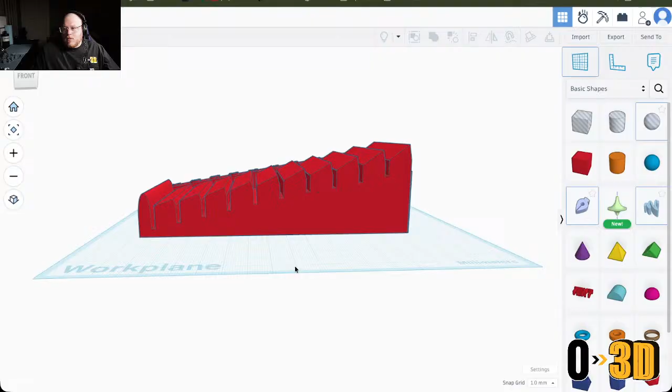So what's going to be new about this next iteration is some of the feedback I got. I wanted to improve the design by making the card slot portions a little bit deeper. In addition to making them deeper, I'm trying to improve this angle here to allow the cards to set into the slots a little bit easier as well. So that's another piece I've got to work on.

Does it look like my stream is frozen? Possibly. No, we are still good. Maybe, who knows? Anyway, I'm just going to keep rolling.

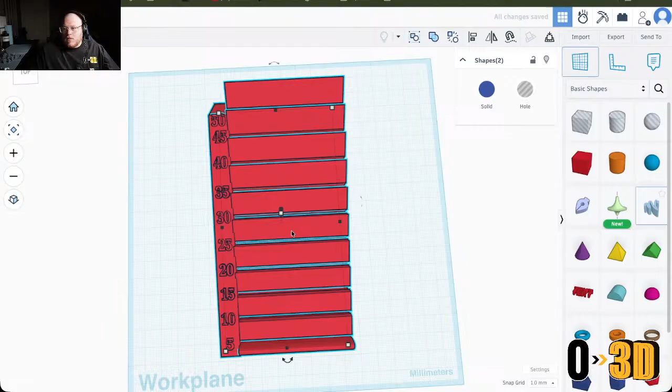Okay, so continuing on here on Tinkercad, we've got, finally, this is back where it needs to be. I kind of want to see if we can center this as well. Let's do a little bit of adjustment to the right here. Nope. We're just going to leave it right where it is. You want to know why? Because I'm still new with Tinkercad, and that's okay.

So it is already dropped to our work plane, and it's sitting flat right where it needs to be. Okay, so one of the things I'm going to start with here, first of all, always make a copy of your work. You never want to overwrite the original just in case you have to go back to a previous iteration. So you can either save as you go, or make copies along the way, so you can go back to a previous version.

Not all software has multiple iterations of the same type of thing. So if this is version 2.0 and 10 minutes down the road I want to come back to version 2.1, I have to make a copy on Tinkercad, so far as I know, and then come back to that 2.1, reopen that file and work from where I left off there. But we're just going to use this copy and see how it goes. I'm a firm believer in not backtracking, unless I have to.

So we're going to start first with an understanding of what this is. We're going to ungroup this. So this is currently a union group, a bundle, and I want to un-union this.

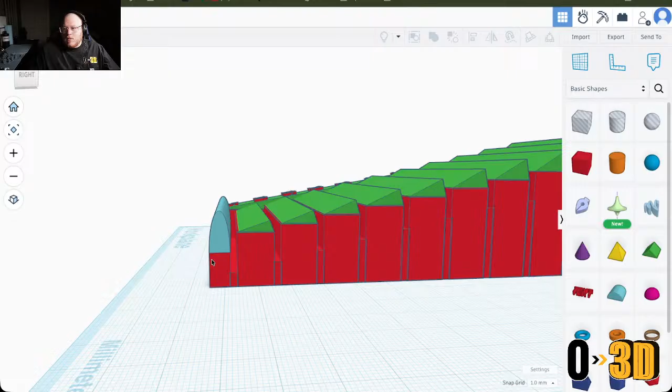So we're going to select all, and there is a way to ungroup right here. Ta-da! And you can see some of the original shapes that I had used here. One of them was a roof, the other one was a box, cubic solid, a box. Also used a round roof here. Lots of boxes. There's some numbers thrown in here because these are the point structures. You actually score the game Rack-O in sections of 5.

So, like I said, learning as we go. Hey, we got a viewer. Welcome, I don't know who that is. Is that from Novice to Nat 20? I'm hoping so. Welcome back if it's you, Jarek. Otherwise, welcome to the content and the stream if you're new here.

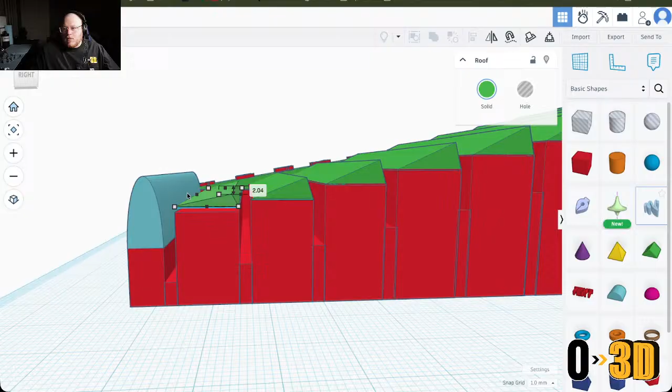Again, new with Tinkercad, figuring out how to do this properly. I'm curious though, if we were to take this and rotate it like that, would that improve the way the cards go in on this side? Yes. Would it make it difficult for this side? Probably. So we're not going to do that quite yet. One solution is probably to put rounded pieces there instead of the angled pieces. That might work, and please let me know if there are better solutions than what I'm coming up with currently. A wedge might also be a piece we can use.

Let's take a look at what the wedge looks like just to see here. Kind of want to see what these look like on the grid on the working surface. So the pyramid is a little wonky. I don't think the pyramid's going to work, so we'll get rid of that guy.

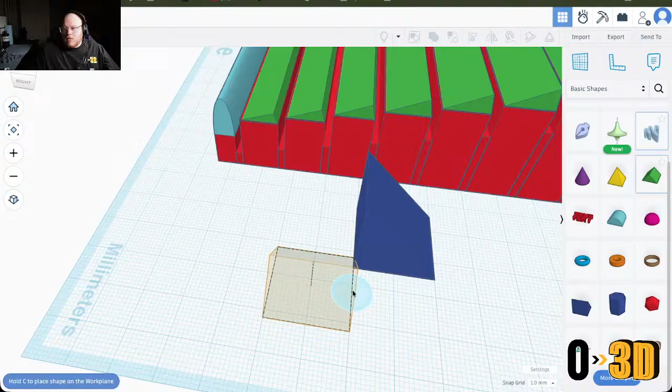A roof could work. However, I wonder if we do this like this. Yes. Okay, so this might be the solution here. I don't know what happened with these, if I just rotated them a bit funky. Yeah, maybe I did.

So I'm going to go from the top view here. Whoa, bear with me as I figure out Tinkercad's controls, ladies and gentlemen. It is a little wonky. Oh my gosh, there's that advertisement again. We're going to mute you. Okay.

I do want to get this measurement. 63.78. So let's do... doing this on a trackpad. If I switch to my mouse, I wonder if that would be better.

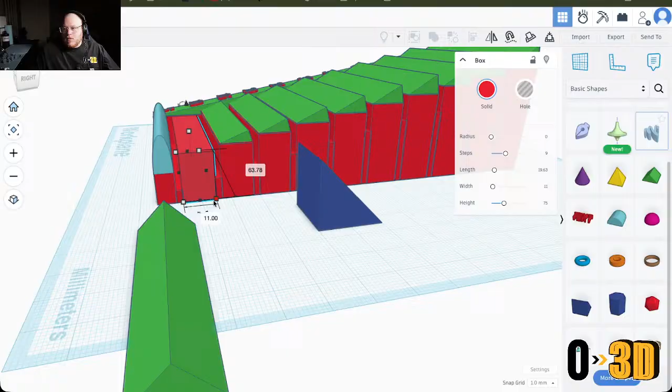Whoa, wrong rotational plane. Okay, so we're going to do this, and we said this was what? 63 point something or other. 63.78. Let's change this figure to 63.78. And we're going to delete this one like so. And we're going to measure this width here. 11. So this plane, this width has to be 11.

Huzzah. And now the height we can go down to, let's try 2 and see what that looks like. Is that enough of an angle? We can find out real quick. 0 to 100 real quick. So let's raise you up. Let's move it here and here and here.

I mean, it's cool how this all works. It's a learning process, my friends. It's definitely a learning process. Why you hover, dough? Why you hover? Whoa. Listen, if y'all have a better solution on how to make this thing drive, I am all ears, my friends. All ears.

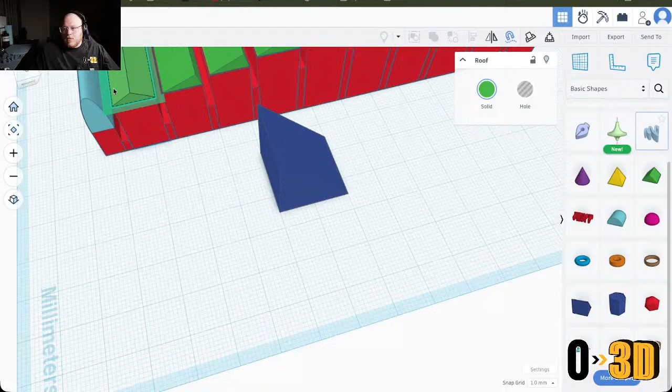Do do do do. Do do do do do. Whoa, wowza. Ain't it fun living in the Tinkercad? I'm gonna get demonetized for this, I'm telling you, it's gonna happen. Living on your own. Whoa. That's a cool trick. Ain't it fun?

I don't want it like that though. So what we're going to do is fix this.

How's the view, Jarek? You still watching? Nice. Ain't it fun?

There's gotta be a way to lock this in right where it needs to go. Not in a magnetized section either. Let's see, folks. Let's see.

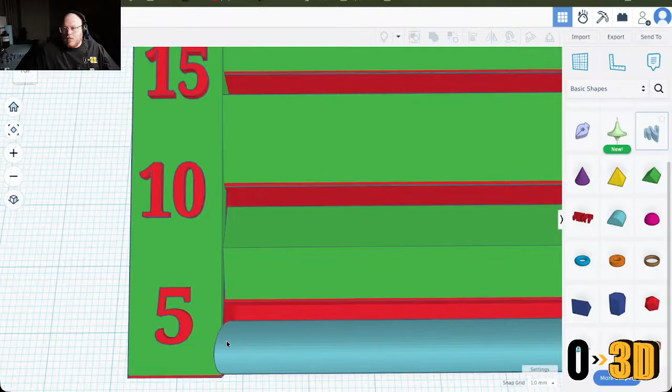Also, these softwares are a little wonky to maneuver sometimes. I'll just be totally transparent. These things are a bit crazy. A bit crazy. Huzzah. Living in the real world.

Okay. Looks good from the inside, I guess.

Let's see. Notice the intense look of concentration on my face. This is craziness, folks, I'm telling you. Have I ever done this before? Not a chance. Can I get some pointers? Absolutely. Can I give pointers? Not at the moment. Let's get some music going again.

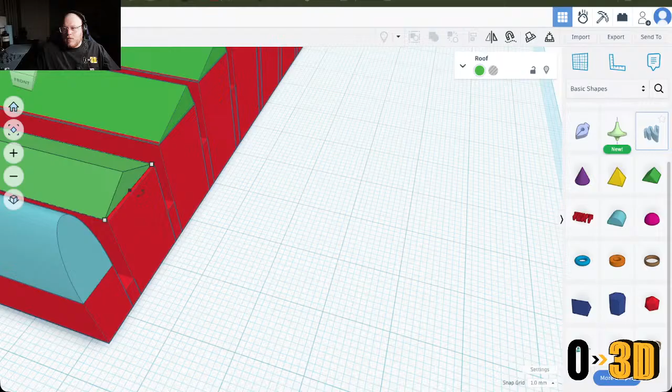It's like a child with ADD. I probably have something. Who knows? Mother, if you're watching, confirm. Or don't confirm. That is the question.

Whoa. I just figured out one of the control elements. Nice.

Okay, I think this one's okay for the moment. So what we're going to do is just let this marinate there. We're going to move on to the next thing that I wanted to work on.

So we're gonna next get rid of all of these green pieces. And my right screen just went black. There it is, back again. Ta-da!

I'm gonna use shift. I'm gonna hit shift and hold so I can manipulate these pieces. Alright. Groovy. That's a bit groovy right there.

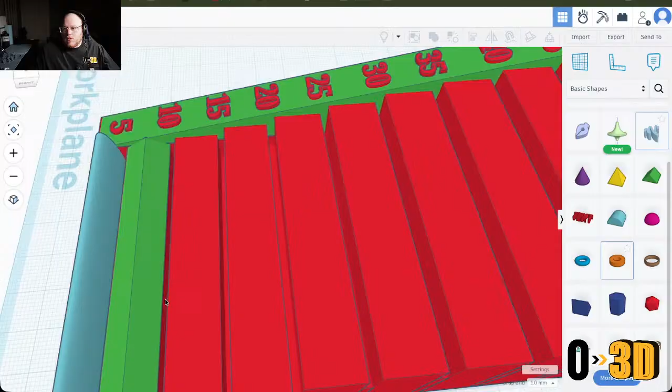Alright, so now that we got those pieces removed, what we're going to do is copy this. But we're also going to verify that our slots here are deep enough. So I want to get this height. So if this is 4 millimeters, what is this one?

7. Okay, so what I was doing before was going up 3, I believe, with each portion. I think I'm going to go a little bit further and separate it with 4. So if this one here at the tall point was 4, this next one here is going to be 8, and we're going to keep going up incrementally by 4. So if that's 8, this should be 12, and so on and so forth.

So 12 to 16. Wow. 16 to 20. And folks, correct me if my math is wrong. In 20 to 24, we can see that they are increasing semi-exponentially, not exponentially, but in the shape of 4, they are increasing accurately. So if this one was 24, this next one is 28.

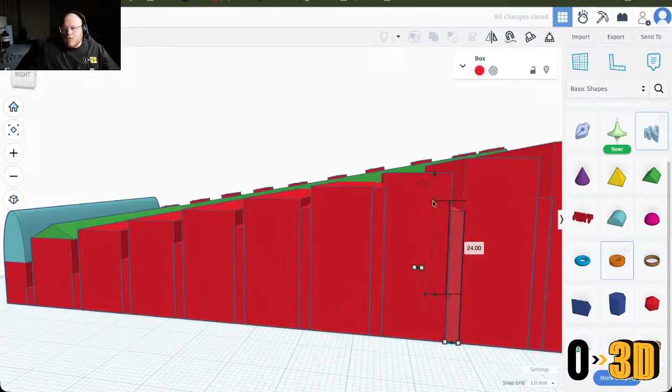This is really raising the bar, folks. Literally. Bow, bow, bow.

36 and 40 should be our last. Whoa. Did not mean to do that. That's okay. Life goes on. And on and on and on and on.

Okay, so now that we have that portion solidified, we're going to then move to these little secondary pieces here, I guess. So if this one is 16, we're going to do the same type of thing. So 4 is to 16 as 8.

Wow, brain stopped working. If you know that quick math, let me know. 4 to 16. So this is 8 to 20. This should be 12 to 24. 16 to 28.

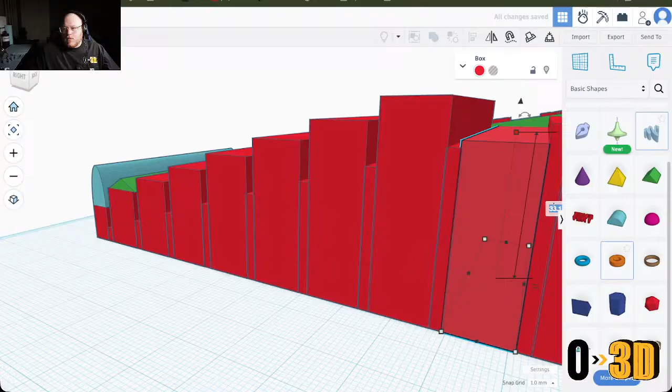36. To then go to 40. Then we shall go to 44. I hear my dog begging at the window next to me. She's not getting in here. 44 to 48.

From 48 to 52 should be it for completion of the stair steps. Yep, that looks fairly decent. I don't feel that I need to raise this any further.

What I might do, however, is put an extension on this to allow the 50 to actually go towards the slot. And in so doing, however, that does bring that out a bit. But we can make negative fill there to fix that.

See, this is what happens. I get distracted.

Do do do do. Do do do do do do.

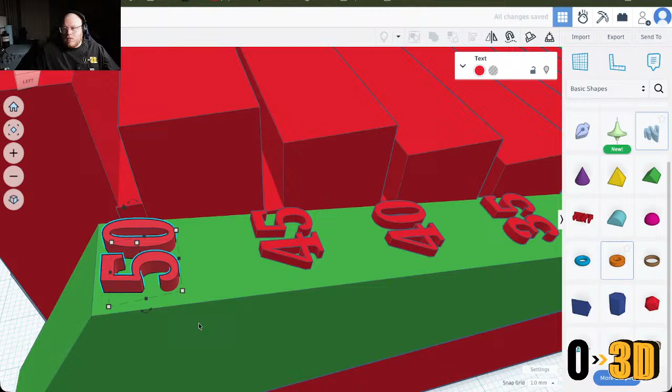Okay, so now essentially this hole could come all the way over there.

Lovely. Isn't she lovely? Does that do what I wanted to do? I don't think so. Not quite. So I've got to create another piece here and make that a hole, which should be fairly simple. Just create a box and create the negative space, right? Right, something like that.

Box, I don't want to box you in. It is a hole. This music's kind of nifty.

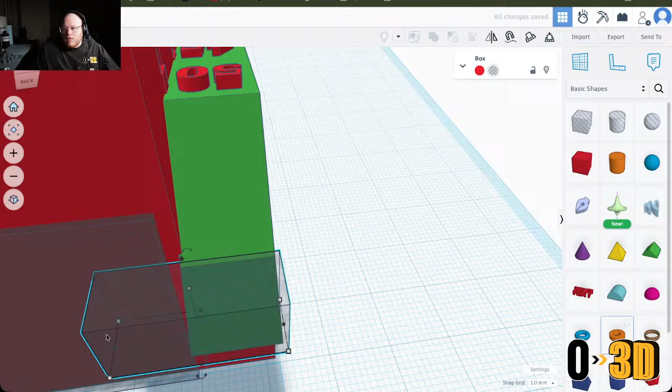Will that be sufficient, ladies and gentlemen? I believe so. Does that cover everything we need here, there, and everywhere? Whoa, craziness. I don't want to see any green. I see, I see.

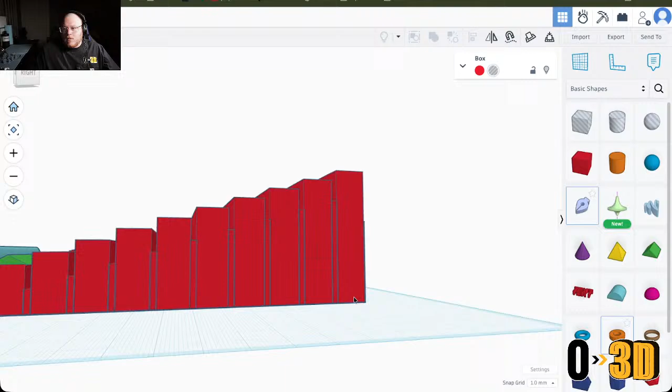Ads are still playing, but we're not going to listen to those, and we're going to be okay. 5, 10, 15, 20, 25, 30, 35, 40, 45, 50. 50 wonderful opportunities for points right there. Nice.

Okay, so I like how this is looking so far. And I do think this roof piece, I don't know why I didn't use it in this fashion before. What silliness was I thinking? And we'll look at the year.

Okay, so pretty much we're going to keep copying and pasting these pieces. And since they're on the same, going up every 4, we can keep that still here. Actually, I'm going to undo that. Reason being is because I like the way the second one is positioned, not the first, if that makes sense.

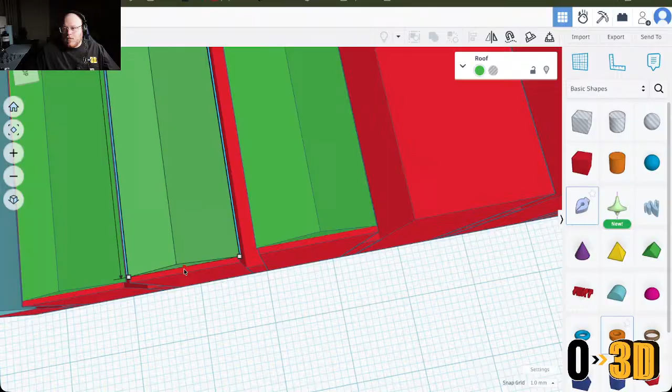Okay, so now that this is in place, I'm going to start the copy paste sequence again here. So copy here, paste here. We're going to raise it up, slide it on over.

Are these not the same width? That's so funny, 11, 11. Oh, 11.83. What did I do? What silliness has I done? Well, folks, I'm a perfectionist, so what we're going to do is we're going to fix this. I don't know why, because it should be right the first time.

Shame. Shame on moi. Okay, at least that's a nice even number. Ugh, now it's going to ruin the whole thing. Folks, this is going to be longer than I'm intending it to be.

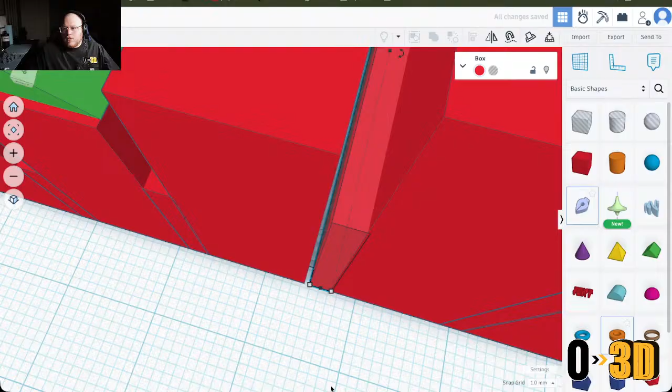Craziness, how did that even happen? This is what happens when you don't pay attention. Even 11, let's do the same thing. Ugh, I am ashamed. Problems.

99 problems and a Tony's the main one. Whoa, don't even play an ad. Don't you do it.

I have a feeling it's going to play an ad. Whoa. What is happening? How do I fix that? Whoa. Crazy.

Okay, so I see what happened. That's crazy, folks. Okay, so the music is playing through. Forget it, we don't need music. We'll be okay. Interact, oh, I can interact with it. Oh, that's beautiful. Oh, folks, I just solved every problem.

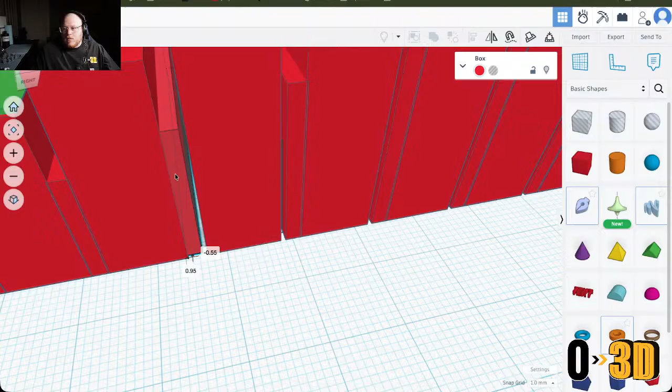Okay, so if this middle piece is messed up, then the rest of them are probably going to be messed up too. Okay, so what's the width of this? Now Tony has to find out. 2.37, 2.37.

2.2. What in the world? What have I done? 2.2, 2.2. Yo, this is crazy though. 2.2. Ouch.

So what's going to happen right now is Tony's going to drag all of that over. Whoa, not like that. Whoa, pressing buttons by mistake. Close that software.

Okay, so if this one here is 2.2, oh, Tony, you're such a goofy goober. 2 point, all of it, 2 point, all of it, all of it is messed up.

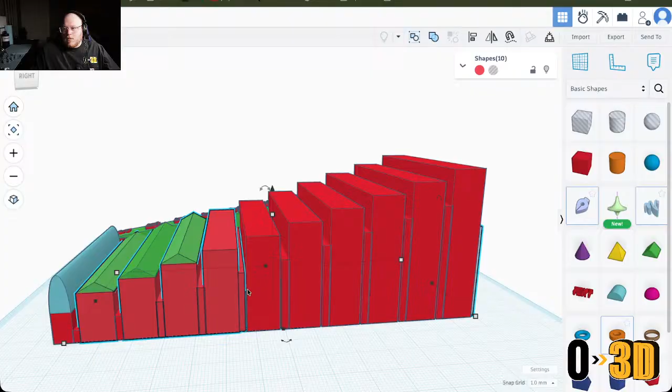What a goofy goober I am. You're a goofy goober, yeah. I'm still a goofy goober, yeah.

Okay, we're gonna start fixing this at the source. 2 point... what did we say, 3.7?

Folks, I don't know what happened. I promise you it ain't gonna happen again next time I'm designing something. This is the first time I ever used Tinkercad, and I messed it up miserably. However, I got the point across with the gift. The gift was a success, in the sense that she absolutely loved it. At least acted like she did. It's hard to tell sometimes when people get gifts.

What did I do with all these crazy numbers? I will say this: I got the measurements from the original Rack-O piece, so at least I'm not totally delusional. I did copy it over and made sure I was following the original sizes and measurements and stuff like that. So with that in mind, I feel like I at least accomplished something.

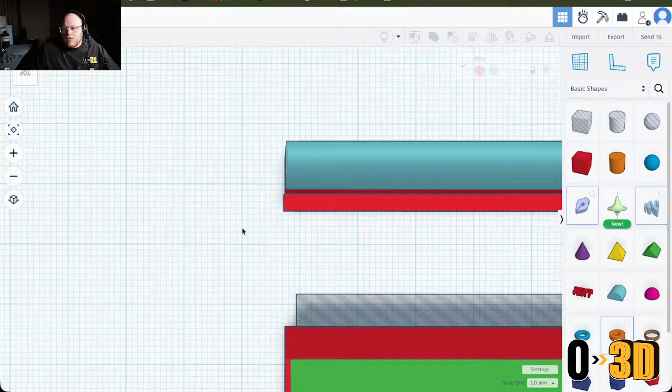63.78. What is this depth width?

So we're gonna start fixing everything. I want it to be right, folks. I cannot control this, I'm so sorry. I'm still learning how to use Tinkercad, clearly. Notice that gap in there? That gap needs to go.

Why won't this fix right? Anyone else ever have problems with Tinkercad like this? Let me know in the comments if you do, because I really need to know. If it's just me that's a screw up, I mean, it probably is true. However, I don't want to say I'm like a genius by any means, but I know I'm not a complete moron with technology.

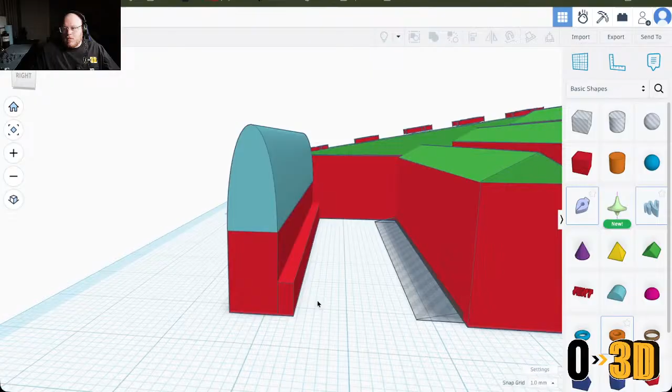We'll at least go with this. This is looking somewhat better. How? How?

I quit. No, I don't. I'm kidding, I won't quit. I won't fail us now.

Okay, so let's do this. I'm going to line these up on an actual grid line, like a normal, sane human would.

D&D related. Also, we're going to go with half increments here instead of this craziness of the points and such. So let's just make it an even 63, because that's going to bug the snot out of me. Okay, great. We're doing this right, folks. I promise we're going to do it right from here on out.

I'm ashamed, I tell you. I tell you what, ashamed I is.

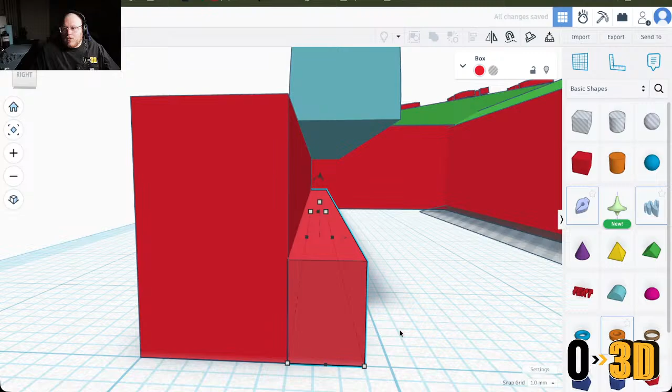We're gonna just make it 3 mil, because why not? But then I feel like it's too wide, no? A playing card, like a standard size playing card—how would that work? Would that fit in this slot? Okay, you tell me.

Okay, Jarek, you played poker professionally. I don't know if that's allowed to be said in a livestream. However, let me know if 2 millimeters is good for the depth, the width of this card slot. Otherwise what I'm going to do is make it 3 millimeters. Let me know. Yes, Jarek, I'm talking to you. Novice to Nat 20.

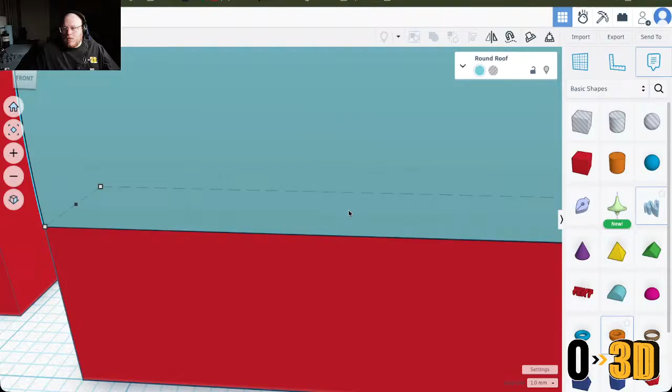Oh, look at those clean lines. That's how it's done. Beautiful. See, I'm already feeling better about that.

Jarek, the width of a card. I'm texting you.

The width of a playing card. Should I leave the gap to be 2 or 3 millimeters? You can answer your phone if you'd like. Just kidding, nobody ever really answers their phone. It's okay, it's okay, Tony, it's okay.

You know what's going to happen? It's going to be even 63. You want to know what's going to happen again? It's going to do the matchy match thingy thing.

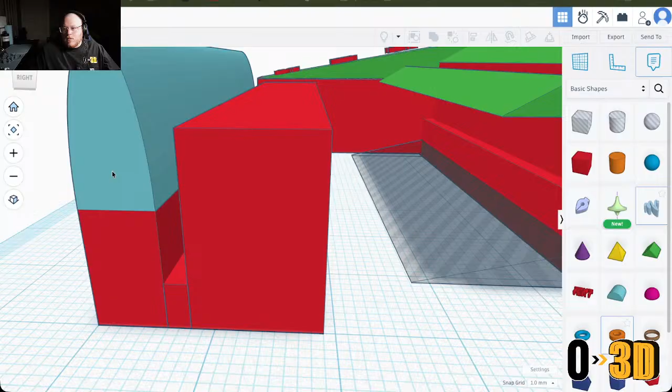What made you start? Do you want to try to monetize your creations in the future once you get more familiar with the software and printer, or is this purely a hobby? This is purely out of hobby, just personal interest in 3D printing and wanting to try something. I fell in love with it and finally just decided to go for it. I never wanted to do YouTube or live streaming, but now that I'm here, it's a lot of fun.

This is technically video 6 on YouTube, so it's kind of cool. In lieu of a pre-produced video, I'm just live streaming a design portion. I don't know if you'll watch the beginning of the stream again later, so I'll just explain it again.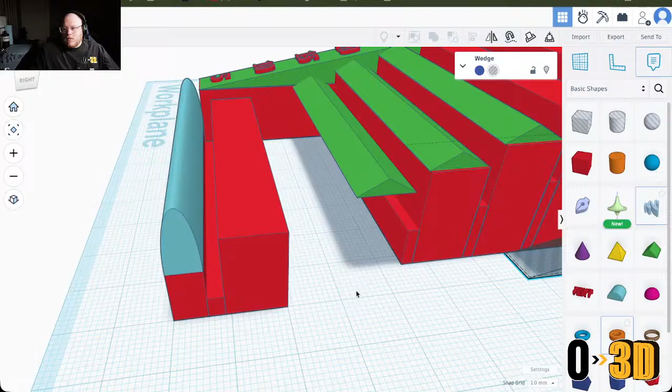What I'm making is a card holder for the game Rack-O. It's a card game where you put cards in sequential order. The numbers go from 1 to 60, and you don't know what you're going to get at any time, so you're drawing a card, guessing, and moving cards around at different points. The rules are better explained than I am, but my wife's grandmother is in her mid-90s, and this is a card holder for her to help her play the game better, to see the cards, because the original card holder is perfectly flat.

Wow, there's my camera. It's perfectly flat. So what I did was adjust it on an incline just a little bit, hopefully to help her see the cards better. I also designed her custom cards with bigger font, clearer text, and fewer distractions so she could just see the numbers on the card. That was her Christmas gift.

So, yeah, this is design iteration number 2 of that card holder. I got some feedback from it and wanted to try to do it better this time. So that's where we are.

Yeah, it's crazy, the design process. I think what I'm going to do now... Okay, so long story short, I'm just redesigning it from pretty much my first iteration and tweaking it. I'm realizing I have so many different mistakes in here because I'm very new to Tinkercad or any CAD software. I guess the whole point of the YouTube channel is to learn in public.

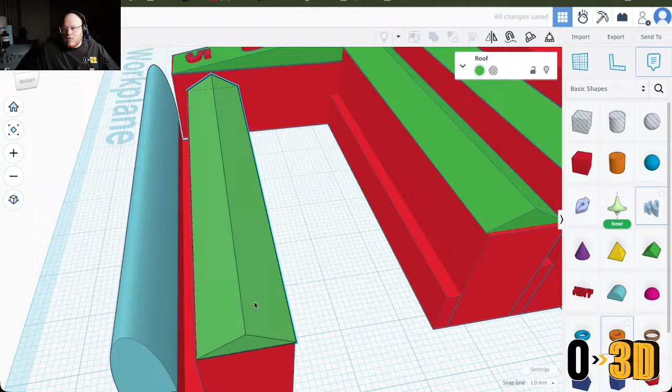So that's exactly what I'm doing, learning as I go. I want this to be exactly 11 wide. But yeah, thanks for hanging out from Latvia. I think that's amazing, I'd love to go visit Europe at some point.

Oh no, my webcam is frozen. That is good information, thank you. Da, da, da.

Yeah, OBS has been messing up tonight for me. I think I'm just going to get rid of that webcam source. Let me fix it here real quick on the back side. I'm just going to go old school, call it a webcam, and go from there.

I have a webcam, but I like my other camera better. I don't know if it's just frozen because of the webcam. What if I refresh this? Ooh, oh, it works. Thank you.

Yeah, CAD is not very newbie friendly, unfortunately. Even just, so I'm doing this off my Mac, using a wireless trackpad with a keyboard, and I thought this would be easier because I'm used to a laptop, but I don't think it's easier, not any bit yet. Also, I'm still learning how the controls work in Tinkercad. This is my second time using it, and I haven't touched it since December.

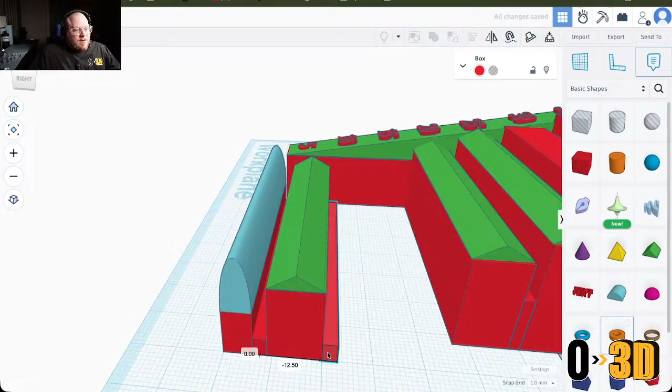You would think I'd know proper audio etiquette because I'm a podcaster on the side as well, and I work in broadcasting - my 9 to 5 is at a TV station. So you'd think I'd know proper etiquette for the mute button, but apparently not. That's alright.

We're gonna keep going. I think my problem is I always think I could fix it in post, but post is not always the solution, especially not with a YouTube live. So what we're going to do is delete these. No wait, I want to fix this first. No, that is the fix. Okay, I see.

Okay. Yeah, I'm already feeling better about this.

I'm digging this music too. Super chill.

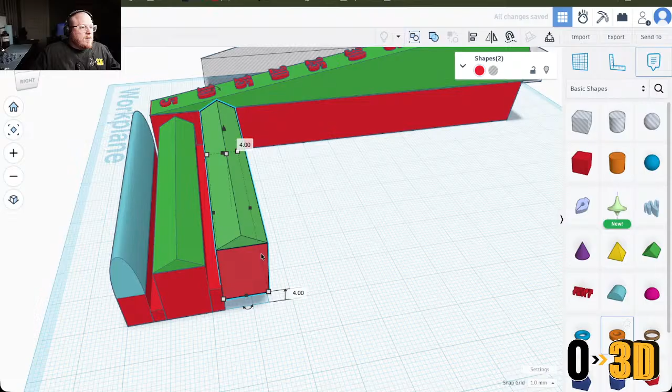Even 20. Let's bring her back down. Huzzah. There might be a better way to do this, by the way - I don't know what that may be. Like I said, it's a learning process.

Okay, now we're making some progress here, folks. I can't believe I didn't do this earlier. You know, logic dictates that you improve with each new time you do something, and I'm hoping I'm improving as I'm doing this. If you guys have any helpful hints, I'd love to hear how to improve my workflow, to make these streams both more entertaining and more fruitful with time management. I don't want to waste your time, my time, the internet's time, because there's enough videos out there for 1.5 million people to be watching all the time. There's billions of hours out there, probably trillions by now.

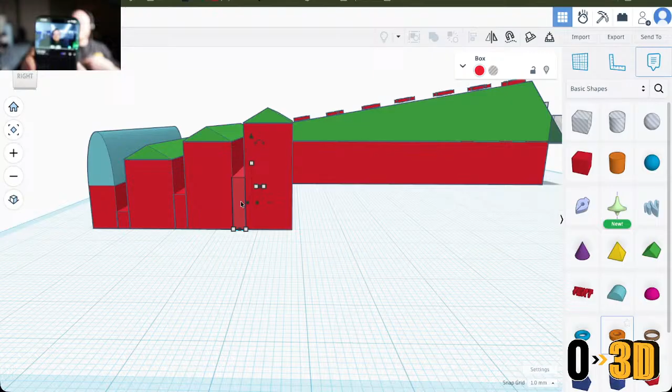Okay, a guy I knew from college - he's live streaming as well right now. I wish I could be watching his stream. So, not darker, but I guess I look a little rougher for the wear. My voice is deeper than it normally is.

We got 5 minutes until things go live. I checked it earlier. Okay, so my friend has a book coming out - another book coming out. And it's going to be great. His first books were excellent. He's a fun dude.

Love this. I'm going to have that going in the background just because I'm a media dude. I can't help myself. All right.

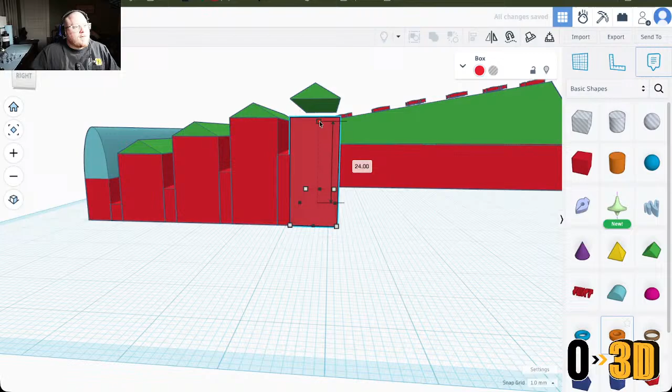Okay, let's keep designing. All right, let's bring this to 16. 3, 4. Bring this to 24. Hey, so much cleaner.

Okay, 20. Wow. 32. If you guys have anything that you'd like to see me design in the future, let me know. I am new to the design thing, but love figuring this out.

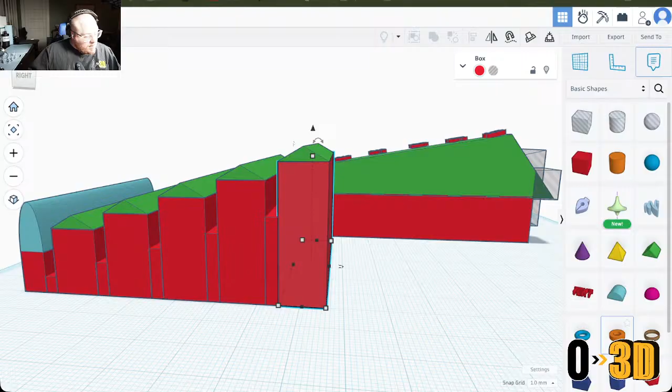All right, so got 1, 2, 3, 4, 5. Hey, we're halfway there. 24. Let's go number 8. Huzzah, 1, 2, 3, 4, 5, 6. I need 10 slots.

Okay, so my friend who is streaming through Mistwood Publishing channel, he is launching his Kickstarter tonight, so I'm so excited.

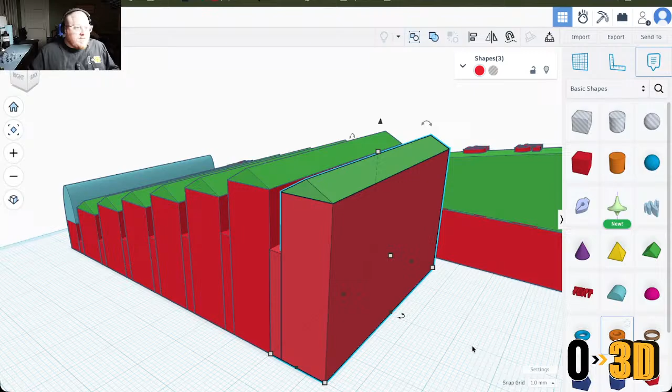I grew up with his wife, Sarah, and then we all went to the same college. Folks are awesome.

28. Do, do, do, do, do, do, do.

I will spend my money, Seth. Or Shay. Wow, my brain stopped working.

1, 2, 3, 4, 5, 6, 7, 8, 9, 10. Haha.

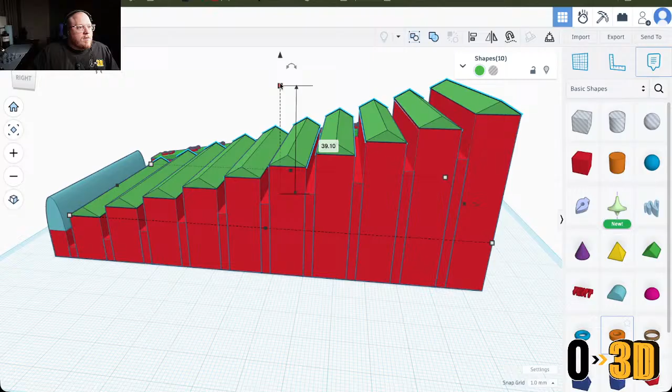So excited for this. Medium male - he's talking about medium male in his thing. What happens if I change this to 4? Ooh.

Nice. I think this angle will be better to get the cards in the slots. What are your thoughts, folks? Would love to hear.

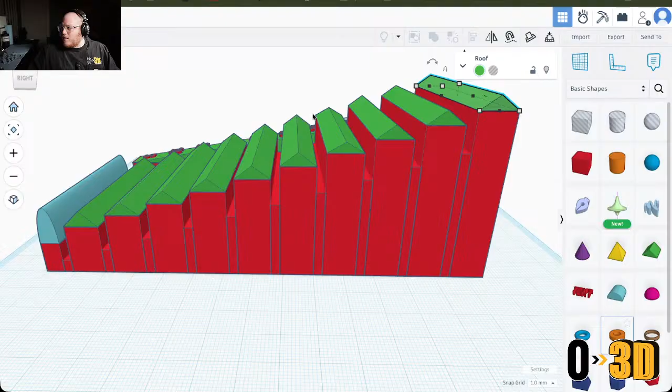All right. I'm a little loopy right now. So excited for this now. I'll be totally honest, redoing this in an equal and clean manner makes me feel so happy. That's so much better. Wow, okay, so this is 63 mil.

So just the score portion here, I guess it doesn't need to be anything crazy. Okay, so this is 11, and that is 3. Okay, so 14. 28. So that's 146.

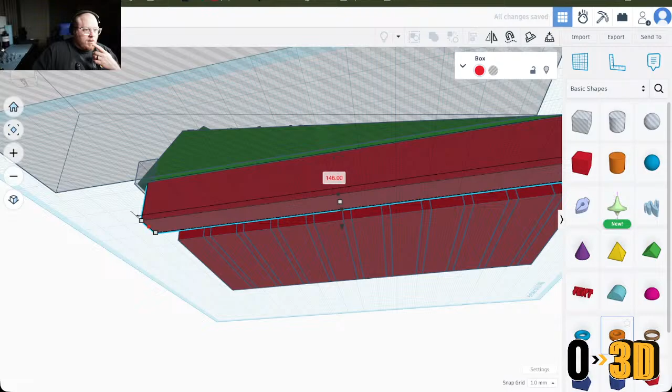That's so much better. So clean. Let's make it an even 10. Nice. Ta-da.

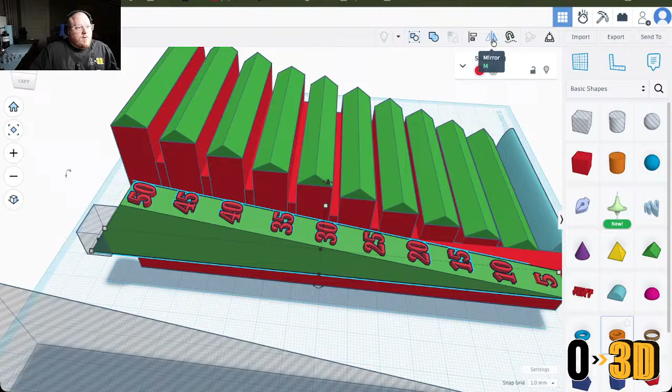I'm going to see this from the top now. All right, folks, we're doing it, we're doing it. Oops, I missed my 5. That's awesome.

This dude that I'm watching, oh my gosh, he's so funny. Shay E. Rock.

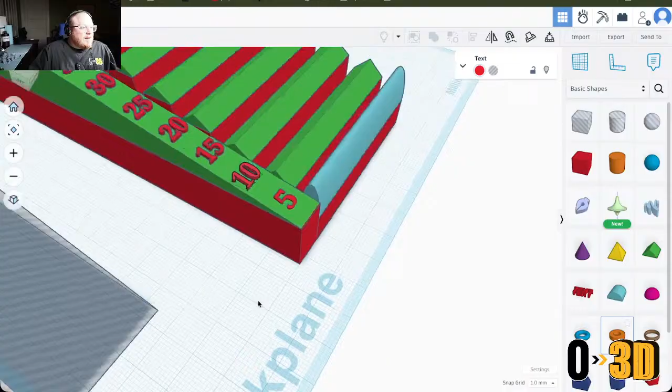Let's do this. Oh, a little too high. This music is so chill. Okay.

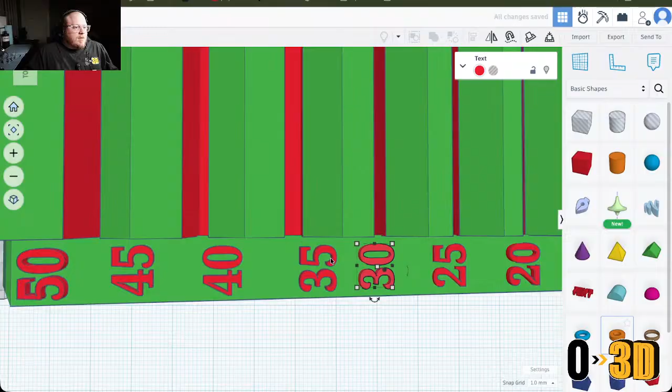I think that looks better there. I am just making these decisions as we go. Huzzah.

Lovely. All right, all right, all right, all right. So now my next portion here is to... Let's go back from the top again. Reason for that will be I want to group these things together properly. Okay, so yeah, we can do that from the top.

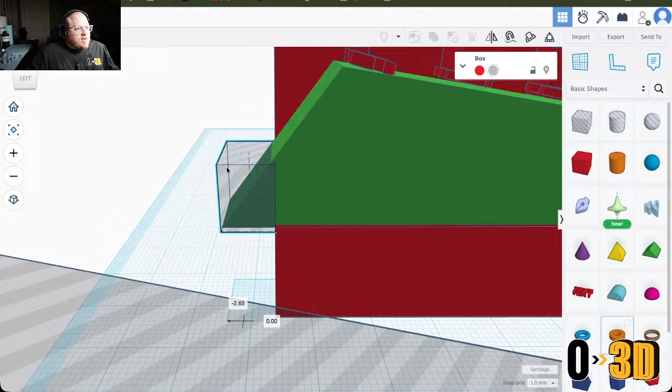Huzzah. Alright, so we are going to group them. Bundle group? Union group. Bundle group. Okay, so I'm going to adjust this guy to just cancel out this little hang off.

I think that will work beautifully. Okay, I am in the unbundle. Okay, now let's do the bundling again. Aha.

So because of that cube little thing here, that square, this guy that's a hole, which is right here, that's helping to cut off that back portion. That's looking lovely, folks. I'm kind of proud of this. I usually don't take pride in my work as much as I should.

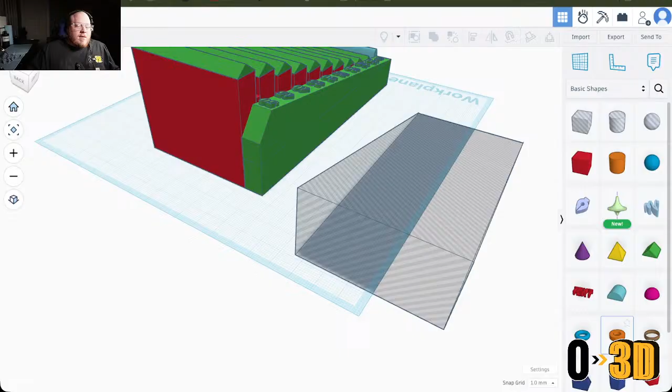Anyway, what we're going to do next is... I think this looks good so far. Did I go with 3? I did go with 3. Thank goodness, okay.

Next portion is we're going to bundle these. Huzzah. Actually, I'm going to undo that first. Reason being is because I want this to go inside here. So this width is 63. Let's make this 60, maybe 61. Huh.

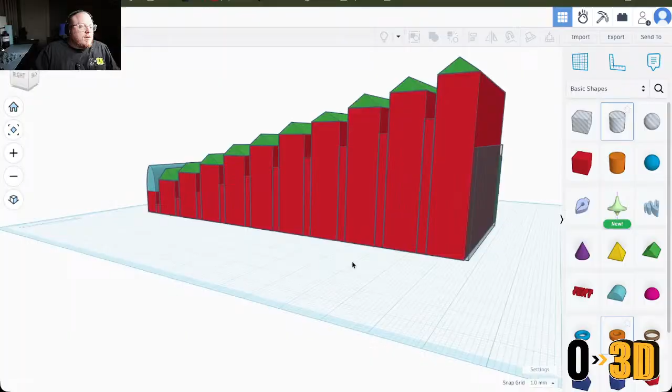Yeah, I'm digging this, folks. All right. Let's go to 36 for that. What if we do 38? Oop. Huzzah. All right. All right.

You know what, I'm going to undo that because I want to move this in just a little bit. Okay, now we're going to go back to top. Huzzah. Ta-da! Great. Digging this, digging this.

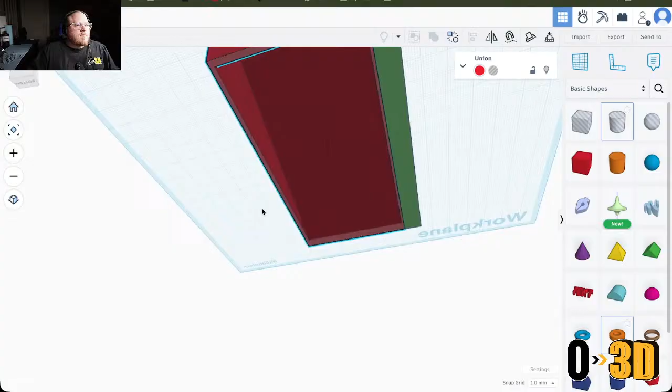Okay, so let's, you know what, I'm going to undo that and take it a step further. What if... what if... this a lot.

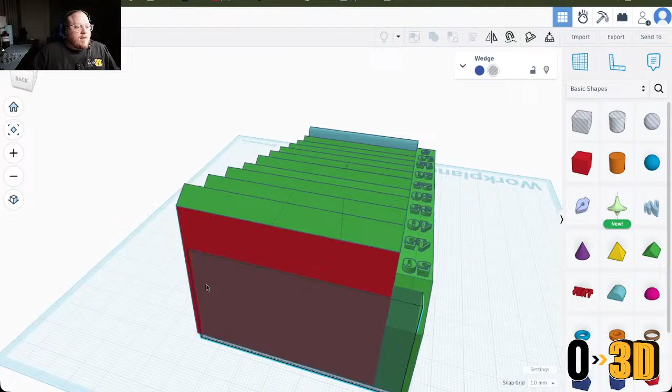All right, well, it looks like we're kind of wrapping this up, folks. Not gonna lie, this is super fun. Whoa.

Okay, so now that this is... I think adjusting the height might help. Let's see what that looks like. Yes, I'm going to put it there. Reason being is because this is looking fantastic. I'm super happy with this.

Did I lose my screen? Yes, I did. I lost my camera monitor. That's alright, I'm still able to see it on my computer. I like redundant systems, folks. Ask my coworker.

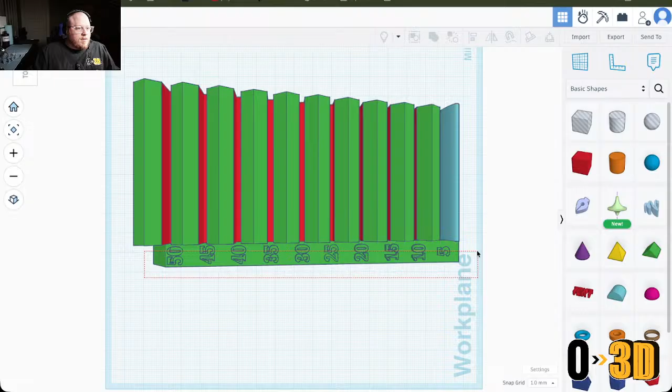Unbundle. Well, I know that's hard to get you to believe me, but I just want you to know that if you're ever feeling down or depressed, and you just feel like everything's wrong with your life and you want it to stop, just know that there are people there for you. Whether you're aware or not. Yay! It's a really hard time. I was able to hollow it out a little bit. Oh, that's beautiful, a little bit of effort. I know you won't believe me at first, but you just have to have a little bit of faith and a little bit of hope. If you're listening to this, know that I believe.

Ooh, I've got a creaky chair, sorry if you're listening to that. I kind of think I need to adjust the height of this so as to prohibit the cards from going off the side. That's what that wall is there for to begin with. Okay, I'm going to do that real quick, and that should be the last thing I do.

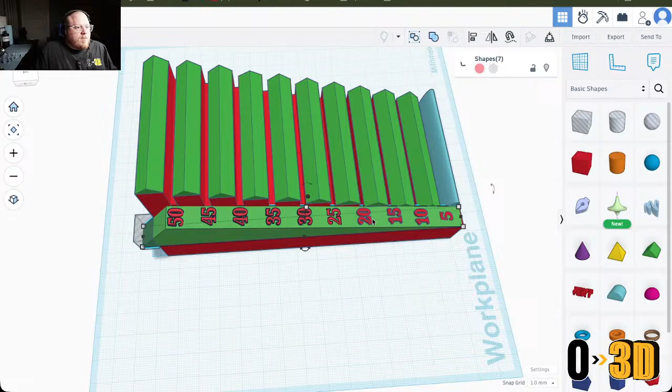Do do do. Huzzah. Nice. Okay. That should help on that side. Okay, we are able to see some of that stuff there. Great.

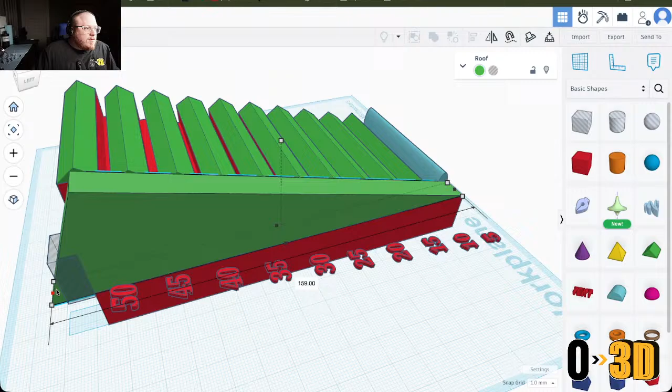Almost there, folks, almost there. That's kind of cool, that would make more sense doing it that way. Alright, let's block this off.

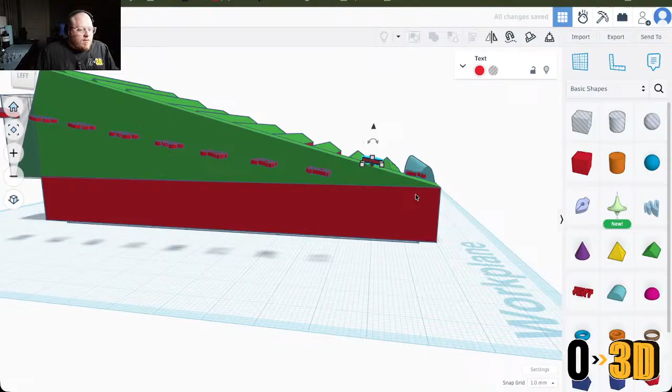I'm loving this. Bring it up. What about angles?

Yeah, that's a good angle. Well ladies and gents, we're just about there. Okay, so this angle will be 6 degrees.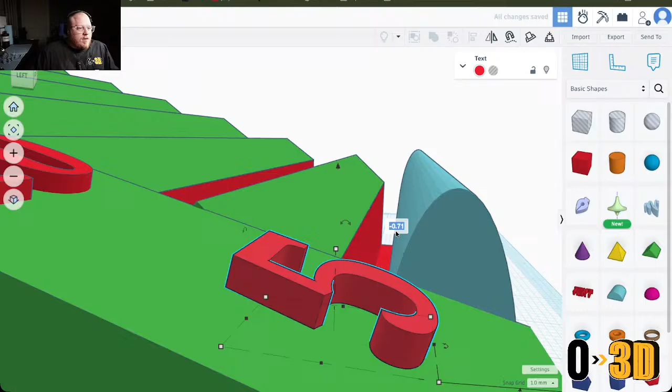I'll leave it back where the rest of them were here. Negative 0.5. Negative 0.5, yes.

I gotta fix that, ladies and gents. I'm learning my mistakes.

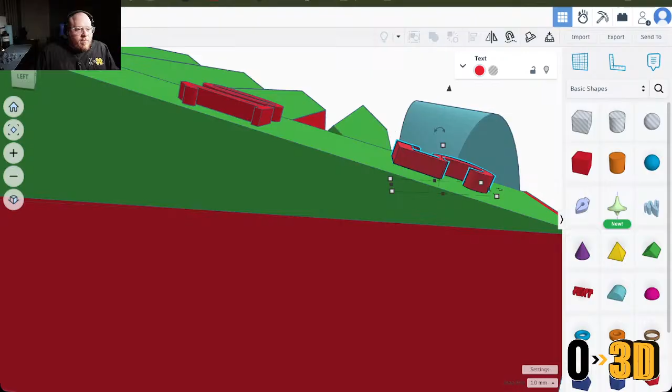If you are just tuning in for the first time, I am redesigning what was a Christmas gift for my wife's grandmother in her mid-90s. This is a Rack-O card holder. The game had originally had a flat card holder, and this is a redesigned version. I had it slightly less inclined than this version. This is version 2.0, and I'm kind of just testing my hand at it, seeing what it's looking like, and we'll see how it goes. I'm looking forward to the outcome of this one. I'll probably print it tomorrow, that way we could try to use it in a game.

I will say it is better to use an FDM printer for this type of product as opposed to a resin-based printer, but c'est la vie. I'll have someone make it for me if I need to.

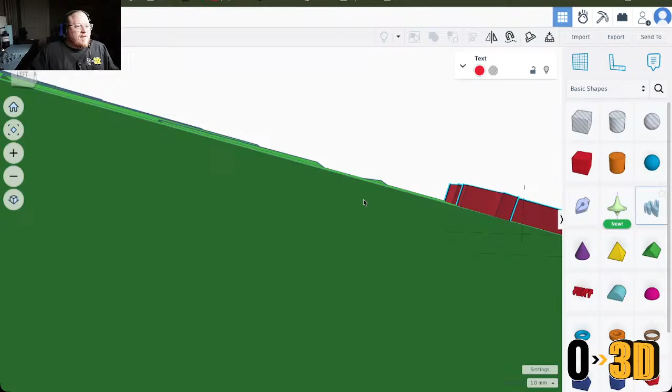Almost there, ladies and gents.

Green Lantern is the place for me. Sorry, my friend on his live stream is talking about the Green Lantern. Farm living is the life for me.

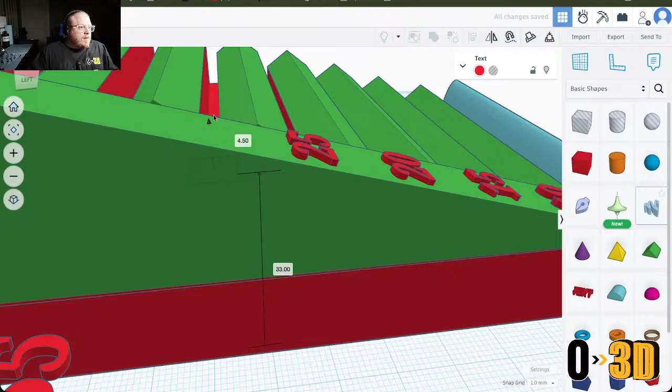Do, do, do, do, do, do, do, do, do, do, do. Huzzah. Do.

Let's fix this angle. Another 2 degrees.

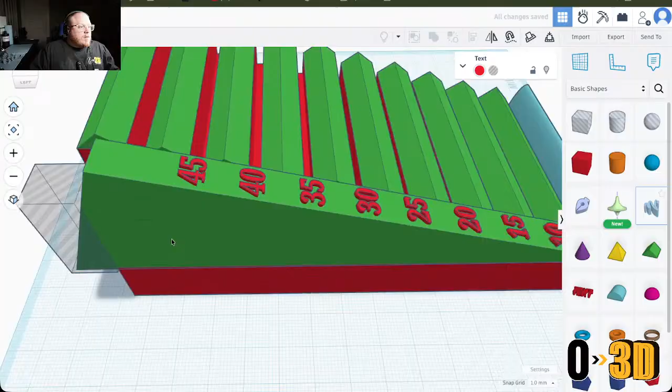Ladies and gents, we are just about there. Oh, don't do that, Tony. Oh right, oh oh. We are on the last one.

Let's do 3 degrees. And on the count of 3. Okay. It's 0.5. Whoa.

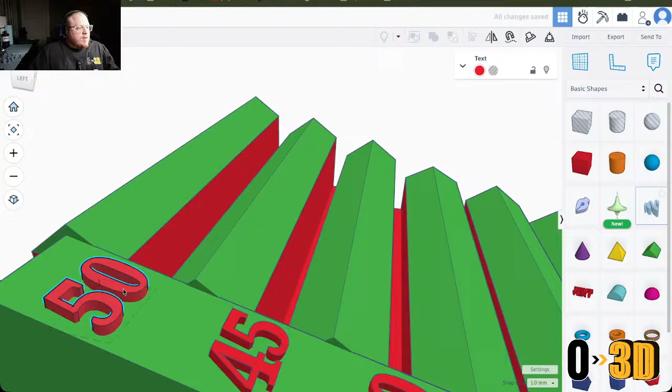Well ladies and gents, I think I've finished it. Let's take a look, shall we? Wow, I think I may have finished it. Definitely proud of this iteration. Looks a million times better. Super happy about this, folks.

Okay, I'm gonna show you guys what the original version looked like. I have it up on my Etsy store. Yes, because even imperfect things are fine being sold. It adds a human element to it, right?

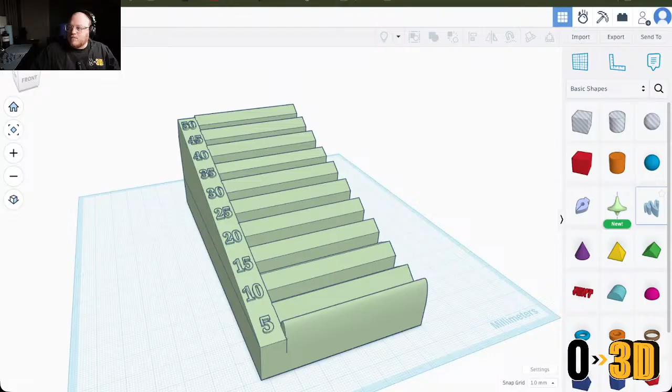All right, so here is the original product that I had made. Designed it again in Tinkercad. It looks terrible now comparatively to the version 2.0. I am so happy that we did this tonight, because this was a flat holder, and this version was better than the flat version. However, there's always room for improvement, as we saw tonight.